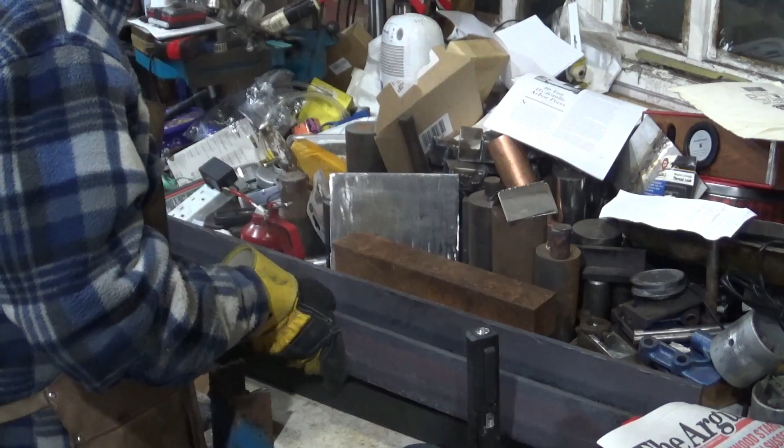Got quite a lot of the big fat square bars. Right, and we have this immense piece of 6 by 3 inch channel. All courtesy of a Mr. Matthews of Warrington. Thank you very much indeed, Ian.

Ian is a fellow YouTuber. He does a lot of scrapping. And he noticed some of this material while he was about collecting up scrap. Steel and iron isn't worth a great deal. I happened to mention I had a project in mind that could do with some of the 1.5 inch, and he said no problem. And then he managed to organise getting it down my way for nothing. So thank you very, very much, Ian, and thank you very much indeed, Glyn, who actually did the driving, because he was coming down this way anyway.

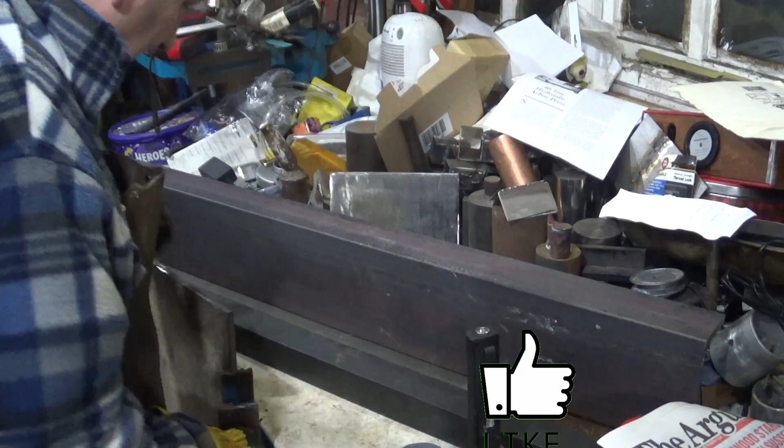And I've also collected together some other channel and this immensely large 4 foot by 1 foot sheet of 10mm plate. And I bet you're wondering, what on earth are you going to do with that?

Well, short answer is that on the 4th of December 2021, chap Fireball Tool put up a video of making a 10-ton arbor press based around a 1.5 ton bottle jack. Let me just grab that out. You can see from the drawing in Popular Mechanics that he used that it's made out of 1.5 inch tube, 1/4 inch thick, used a 1.5 ton jack. That is not a 1.5 ton jack, that is a 12 ton jack. More of that in a minute.

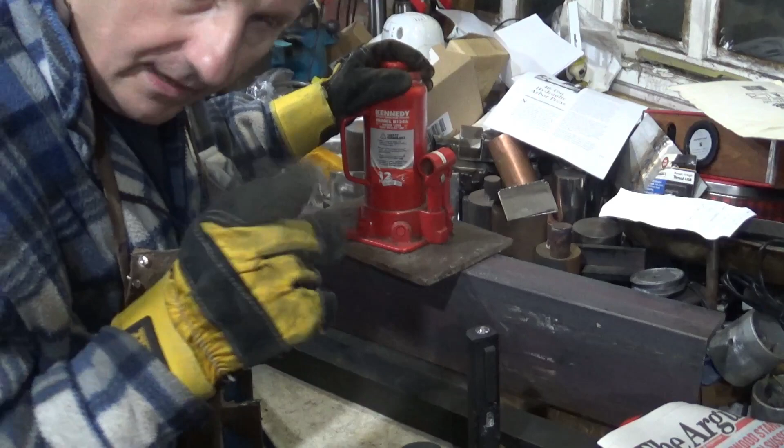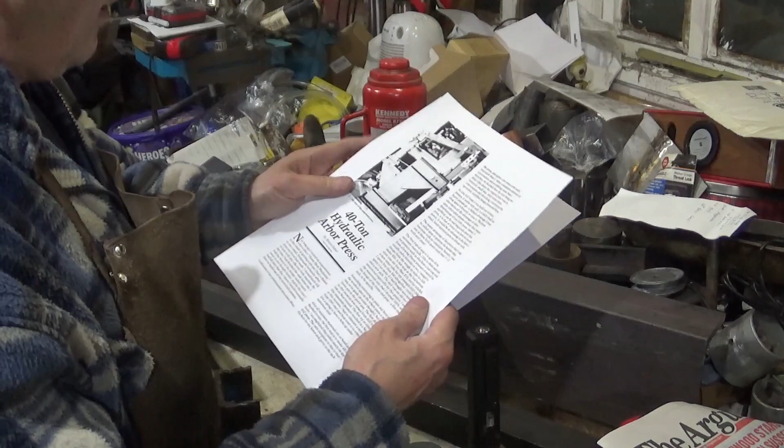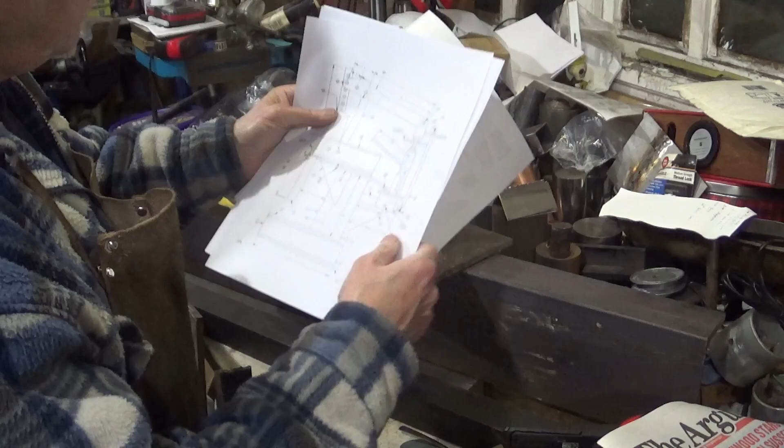So I was talking about this to someone who then said, well, Home Shop Machinist did this, which is a 40-ton hydraulic arbor press, which is almost exactly a copy of the Fireball Tool one, apart from the fact it uses much bigger, much fatter materials, to wit, some of this stuff and some of this stuff across in various different places, and the ram, instead of being a 1.5 inch tube and a 2 inch tube, that's a 1.5 inch bar, and that is fabricated tube from 10mm plate. And there's a few other bits of plate round and about.

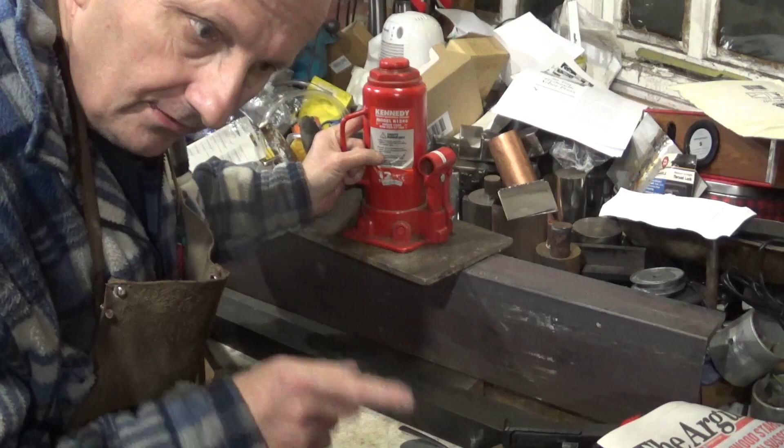So what I thought I would do is go and start acquiring materials, which is why I went to the scrapyard. Big problem I had with the scrapyard is they didn't have any square bar. They'll probably end up with loads of it now. I don't need it from them anymore. And I got this from the scrapyard as well for £5. The scrapyard is George Richardson's. They have a place in Brighton and a place in Goddard's Green. Very nice people, very helpful.

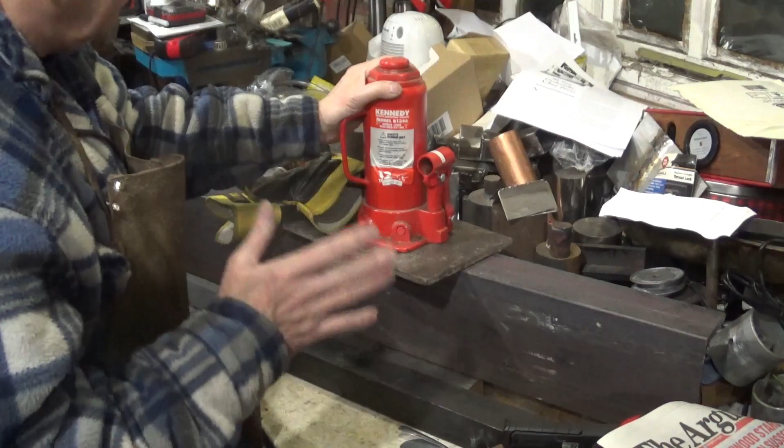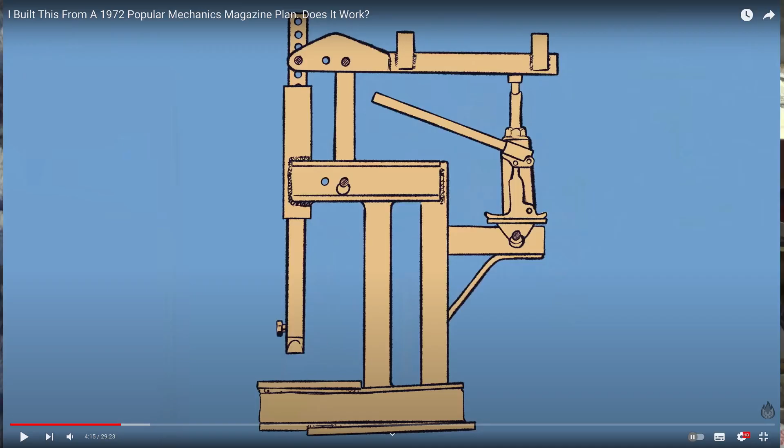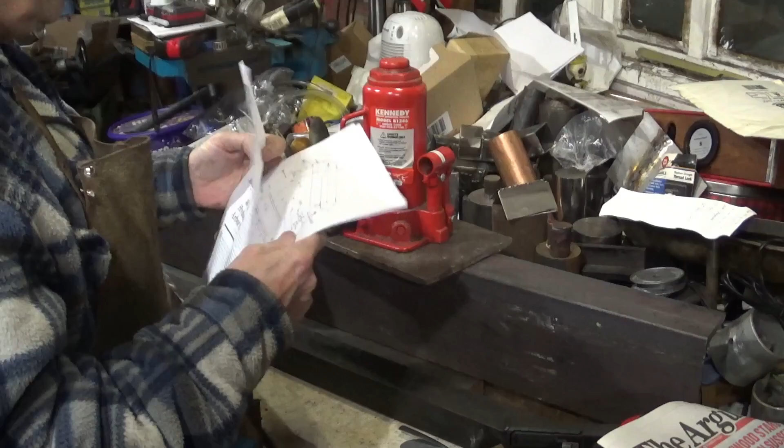And I'm also going to make it so that I can fit a decent sized lump in between the feet of the arbor press. So once I've done that, I will start making. It will involve a lot of cutting. I'll spare you the cutting because that's not going to be very interesting. You might get a shot of the power hacksaw we have in the club, but I will spare you all the angle grinder cutting of this plate. And that will be a series of a couple of videos I expect coming up reasonably soon.